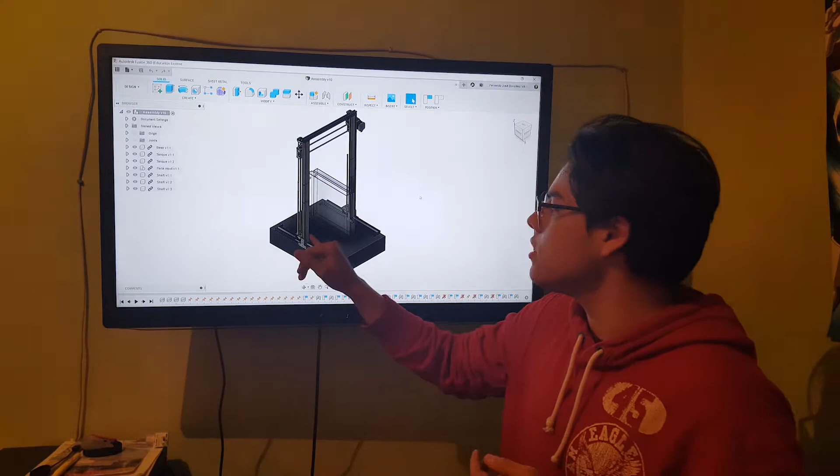The first thing is that we haven't distanced ourselves from the original design. We kept the same design, but here there are two support guides in the way this goes up and down. We only use one in order to keep it straight. We use two, but in reality we only used one.

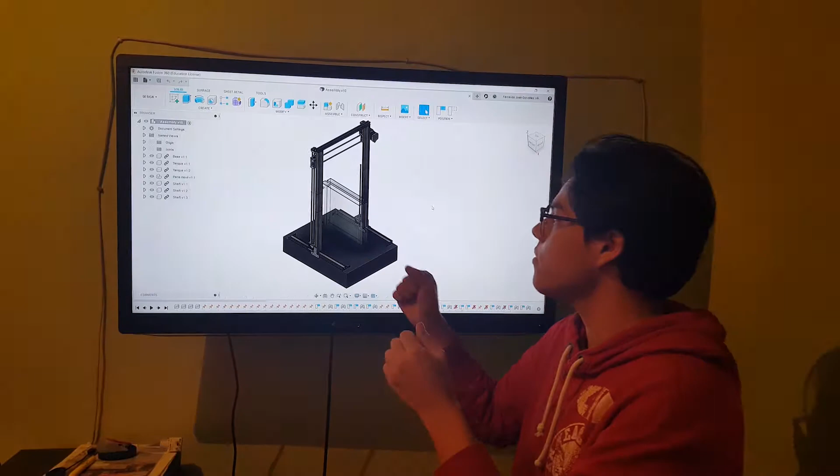Right here the rails move in order to move the box, but we kept the same shape for the U. It's a steady one, we haven't moved this one.

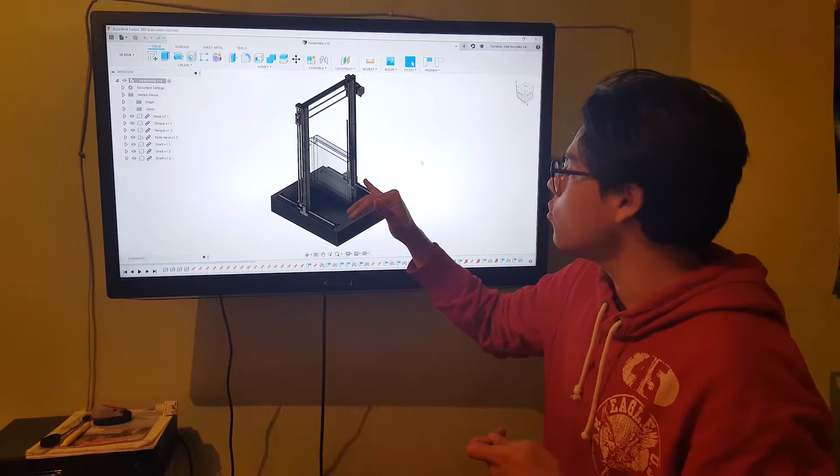The pump right here, we've put a pump in order to clear out or dish out the acid in the container, and we use a sprinkler right here in the middle to spread the water in the cleaning stage.

Right here the motors, we haven't got them, but we're gonna use them in order to move the X axis and the Z axis. And that's pretty much it for the prototype.

In the original prototype, we didn't have this claw. We 3D printed this claw in order to maintain the PCB in place, so when you put it down and up, it doesn't fall down.

We have already the rods that maintain our X and Y axis in place, and we have the guide right here. As I mentioned earlier, in the prototype we used two guidelines, but here we only use one.

So here's a side view. We still haven't gotten the shape of the U in order to maintain these rods in place, but we're gonna make them, because this right here in the upper part leads to the water pumps part. So we haven't got that part yet.

Here's another side view so you can see the project in place. There's a sprinkler I didn't show, but there's a sprinkler. You got a hose and you connect it, and this cleans all the PCB out after the acid stage. So here's an up view of it.

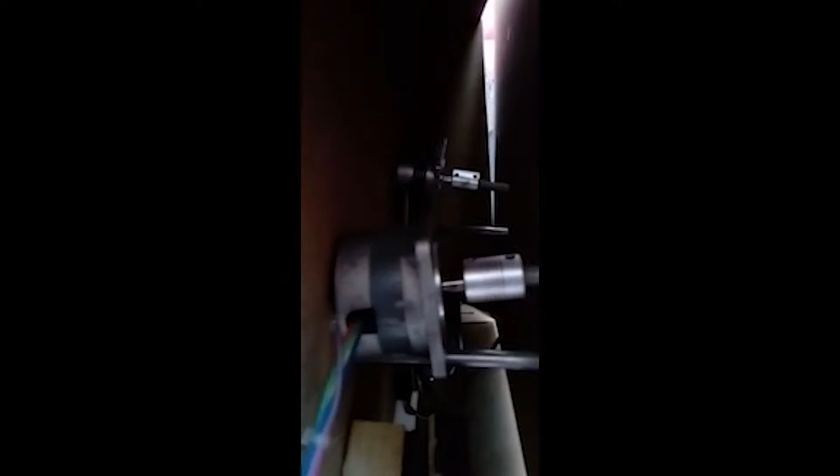Well, this is a dipstick that will move upwards and downwards with the help of a stepper motor. Here we have two. Also, it's going to need guidance, so we use the stick.

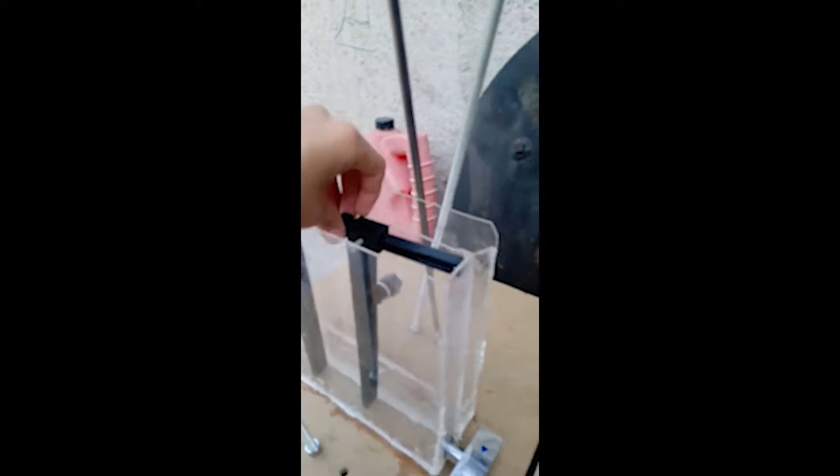And to adjust the PCB, we're going to use this. You can adjust it with this, and the maximum is 20 centimeters. It's going to use another motor.

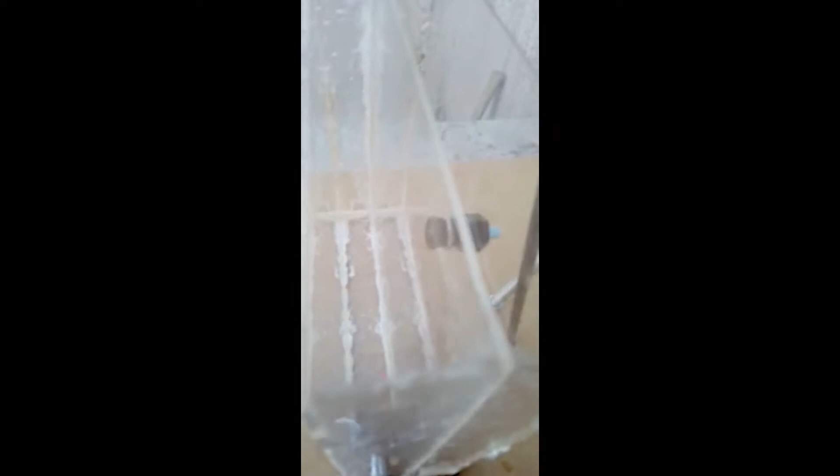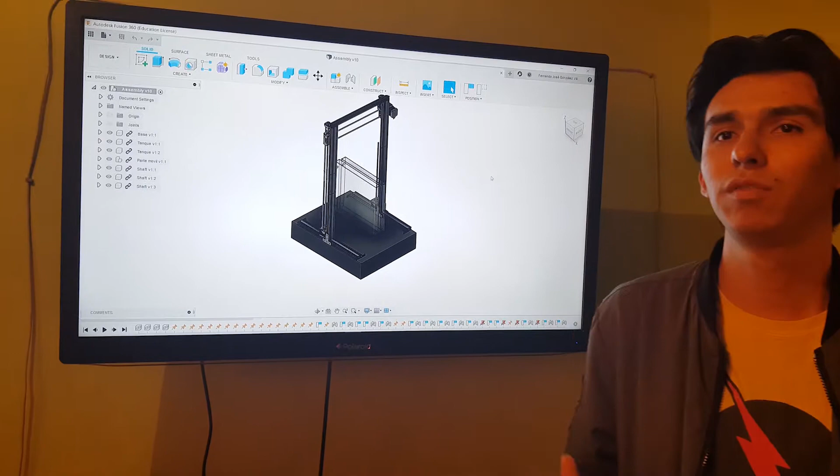So I'm going to talk about the function of the basic movement components. It's basically made up of two different axis movements. The first is the Y-axis movement, made up by two NEMA 23 stepper motors, and the X-axis is made from one NEMA 17 stepper motor.

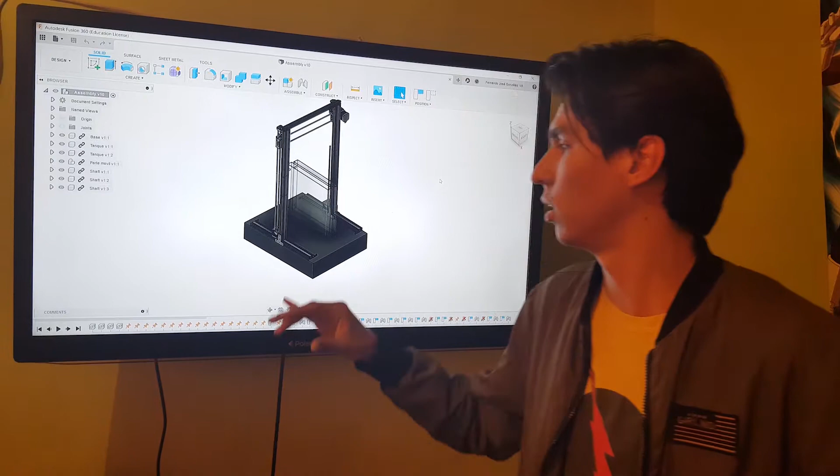So this is basically our two-axis system movement, based on a CNC and plotter machine, and the purpose is to move the plate up and down and across the two tanks. It's made up of just two motors. Okay, so in our current state, we're missing just the X-axis.

We're still waiting for the motor to arrive so we can mount it, and that's basically all the movement we have. These two rods are for the Y-axis, and as I said before, we're just waiting for the X-axis to arrive.